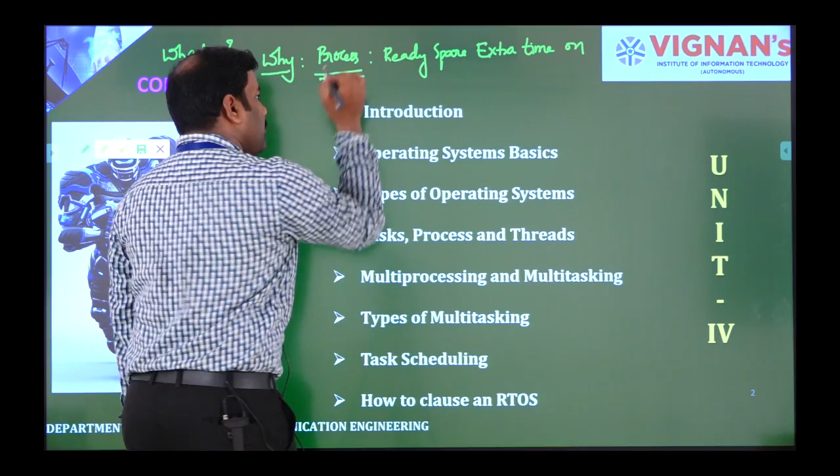So everyone nowadays needs time and finance, or money. These two parameters are very, very crucial parameters in any one of the systems, may be related to OS, may be related to RTOS, may be related to any one of the task accomplishments, whichever it may be. Time and money are the most important parameters.

So, if it is the criteria for any process, for example, I have my voice, my speech. Once I store my speech in one register, or it may be a pen drive, once it is stored, you can do whatever it may be.

Usually speech is an analog signal. For this particular signal, you need to apply sampling. Then you will get discrete components of the analog signal, which is nothing but my speech.

Once sampling is completed, then I will go to quantization, meaning based on the sampling values or discrete values, I would like to convert those values in terms of either 0 or 1, or simply we call it converting an analog signal to a digital signal.

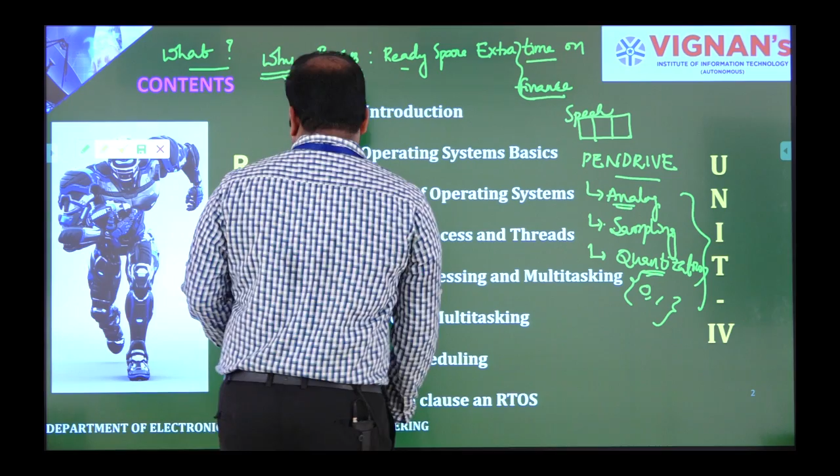For this entire process, I have techniques like, first I need to store the speech. Once after completion of storing, I need to take the support of any one of the OS, support of operating systems. Once that is accomplished, then I need to apply the technique of sampling.

Then I have to apply quantization. Then only will I get my output as digital speech.

But if I have the support of RTOS, then no need to take any one of the support of OS, because RTOS itself has operating systems. It will work based on real-time applications.

So, already having this RTOS support, and sampling, quantization, directly here RTOS will support ADC or DACs, digital to analog or analog to digital converters. So directly by using RTOS, we can operate ADC and DACs.

If it is a pure OS, we can't operate DACs and ADCs. That is the reason why we need real-time operating systems.

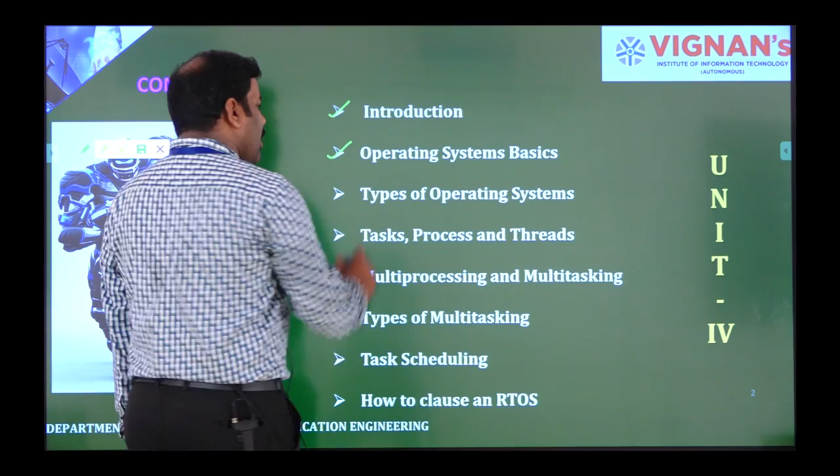So, these are the index or contents which we have in our 4th unit. First one is introduction, so why and what, that you already learned now, and next one is operating system basics, which is just like OS structure.

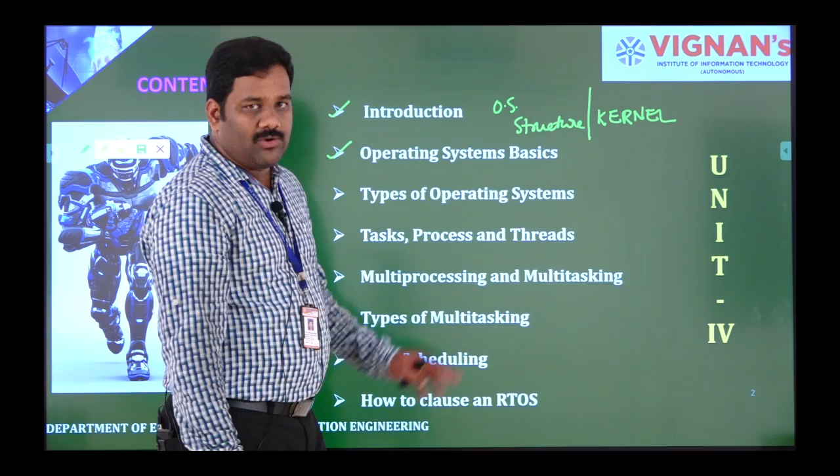Usually you people used to call it up as kernel, the heart of the OS, like the brain of a human being. What are the internal parts available with the kernel, how it is going to be operating, and what are the tasks that are going to be performed by the kernel.

Next one is types of operating systems. We have general operating systems, like you already seen Linux, Windows, Windows 98, Windows NT, Windows 2000 Professional, Windows 7, Windows 10, even Windows 8 also is there.

So what are the types of RTOS, real-time operating systems? And next one is what is meant by task, what is meant by process, and what is meant by threads in RTOS. And next one is multiprocessing and multitasking.

So what is this one? Process. Here what we have? Process. So if it is here, you are going to learn about what is one single process, and here you are going to learn about how multiple number of processes are going to be executing, and for that purpose what are the precautions that you need to take care of.

Same as here, you will have what is meant by task and how it is going to be operating. Here you are going to learn if multiple tasks are available, how it is going to be executing, and what are the precautions that we need to take care of, and how we are going to declare the tasks.

And next one is types of multitasking. Here you are learning about what is multitasking, meaning how you are going to implement several number of tasks at a time. Here multitasking types are available, 3 types are available. So which type and how it is going to be operating, we will see in the topic.

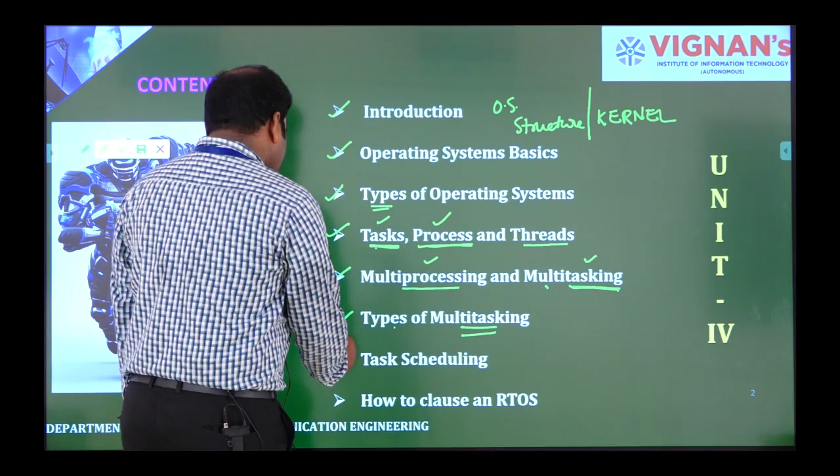Next one is task scheduling. So here you have task, multitasking, and types of multitasking. So what is meant by scheduling? It means at which instant of time which task has to be executed, based on which type of algorithm. Usually in this multitasking you have two types of algorithms available.

First one is pre-emptive, next one is non-pre-emptive. So again, pre-emptive you will have 4 algorithms, non-pre-emptive you have 3 algorithms. So what are those algorithms and how they are going to be operating, we'll see in this topic.

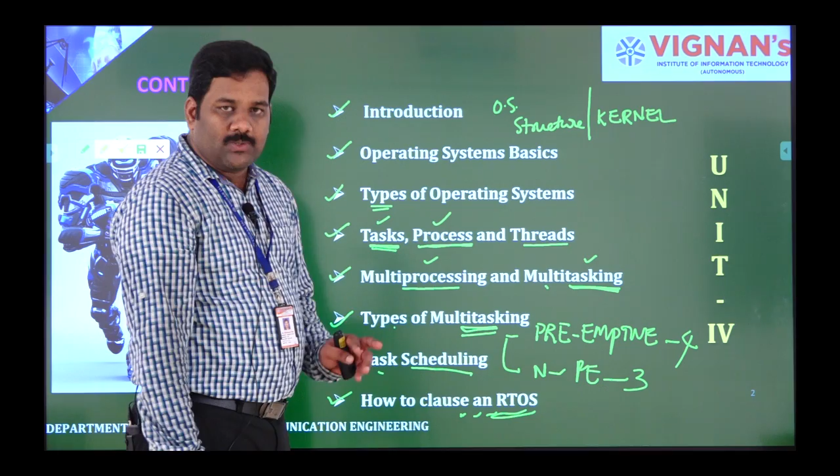And the last one is how to choose RTOS. So how you are going to decide which type of RTOS that you are going to use for a specific application. That will depend upon several parameters, and here you are going to discuss those parameters which will influence choosing any one of the RTOS.

Okay, have an introduction now. That's what exactly I'm already explaining to you people, but based on super loop based approach. So have any of you heard about what is super loop based? Super loop is nothing but simply a C program that you can write.

For example, I need to calculate, or else I need to display printf, or else I need to display hello as my output. So first I need to call header files. That's what it is, #include stdio.h, standard input output header files. Once header file is called, it means header file will support implementing any one of the logic which you are going to write in the program.

So next I'll go for void main. So this is my task. Simply I just need printf 'hello'. Meaning directly I need hello, the term hello has to be displayed in our output.

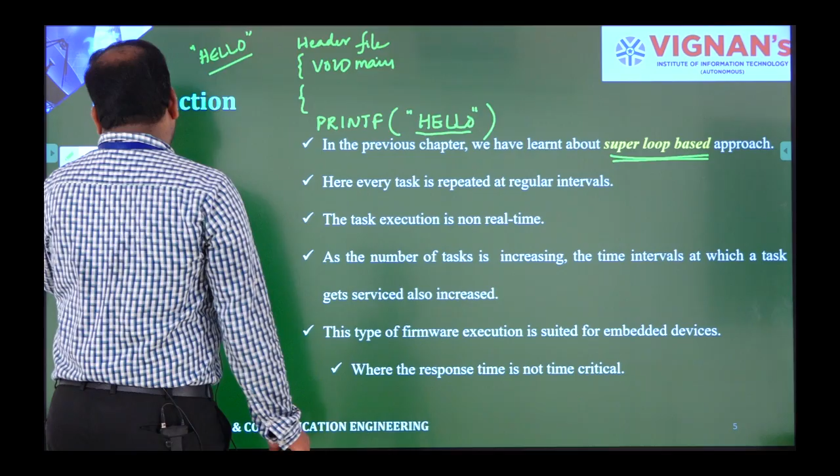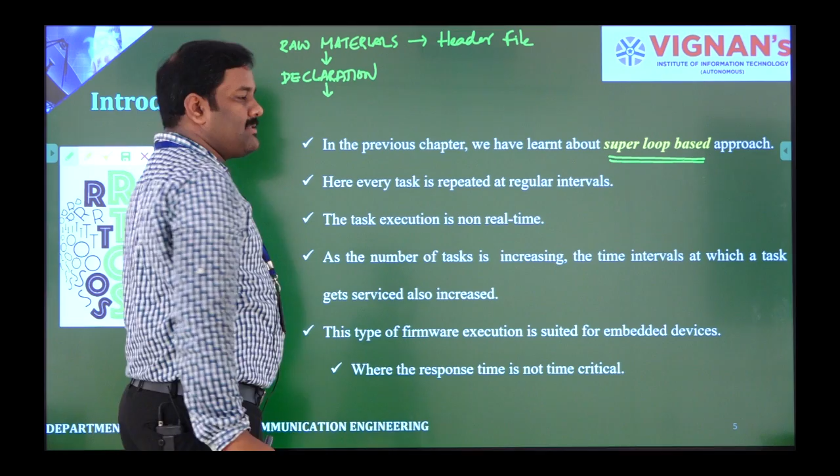Same as super loop based means, first initially we will consider the raw materials, like previously I explained, header file is the raw material. Once raw materials are taken into consideration, then you are going to declare the values, declaration part. This will take place: which are the elements or variables that we are going to use in our program, and what are the corresponding values that we are going to assign for those variables.

For example, I have 2 variables, a and b, and I have values of 5 and 10. In declaration, I declare a equals to 10 and b equals to 5. So these 2 values have been declared by the user. In this entire program, whichever it may be, the variable a and variable b will be referred with 10 and 5. That's what we are going to implement in our declaration part.

Once declaration is completed, then we are going to implement the logic level. Logic is nothing but logic as usual. For example, y equals to a and b. So a is one of the variables and b is one more variable. Between a and b, there is an AND operation. It has to execute the AND operation.

For example, here I am taking a as 1 and b as 0 if it is digital. As you are already familiar with the AND gate, what is the truth table of the AND gate? So a, b, and the corresponding output is y. You have 4 options: 0,0 or 0,1 or 1,0 or 1,1. If it is 0,0, output is 0. If 0,1, output is 0. If 1,0, output is 0. If 1,1, output is 1. This means whenever both inputs are high, only at that instant will output be 1. This entire logic can be performed by a predefined function.

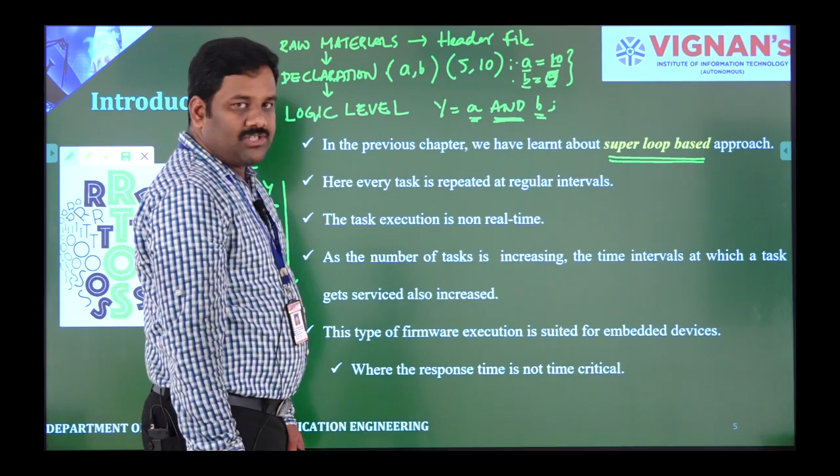We used to call it AND as a predefined function.

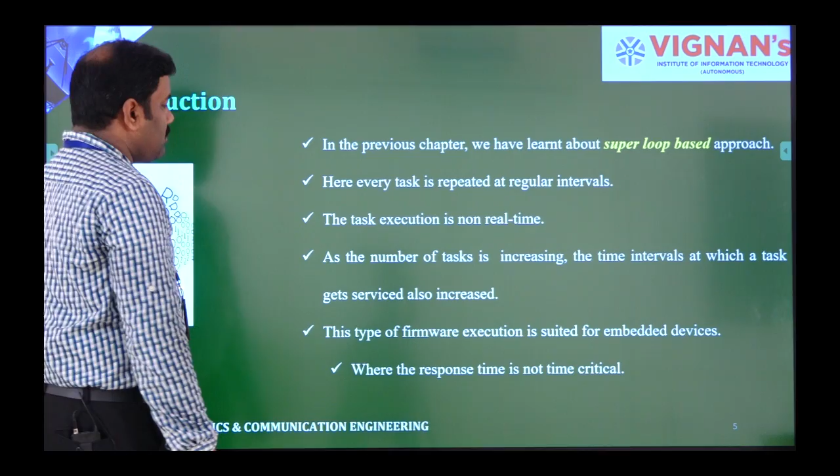Once output is going to be stored in Y, then my logic is going to be AND. So, super loop based means this is the process: initially you need to declare the raw materials, or library files, to call off or execute the logic, and the declaration part - the variables or constants that we are going to use in our program have to be declared. And the logic level is how you are going to implement and utilize these two variables. That is what super loop based approach is.

So this entire process is completely dependent on the general operating system, which can perform all these tasks, because all these actions are not time dependent.

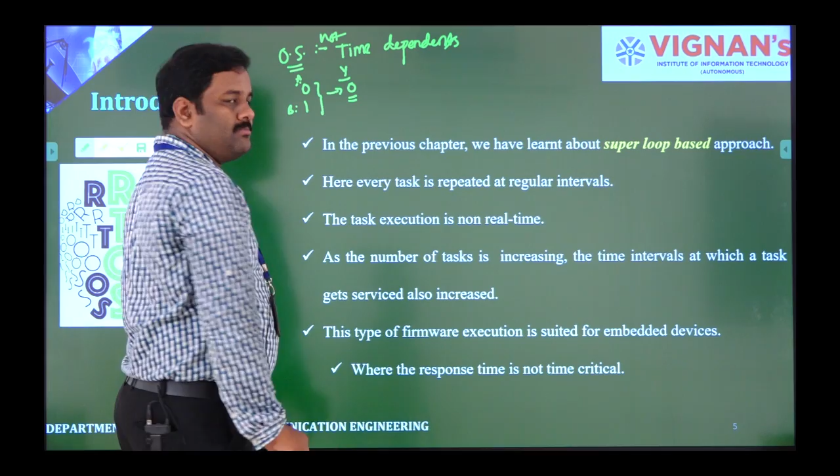For example, I have given 0 and 1 as an input signal and the corresponding output is 0, that I know. But even then, when I apply 0 and 1, the corresponding output has to display 0. But it will still take some time to display 0 - that time may be 1 nanosecond, 10 nanoseconds, 100 nanoseconds, or 100 milliseconds. We can't predict it.

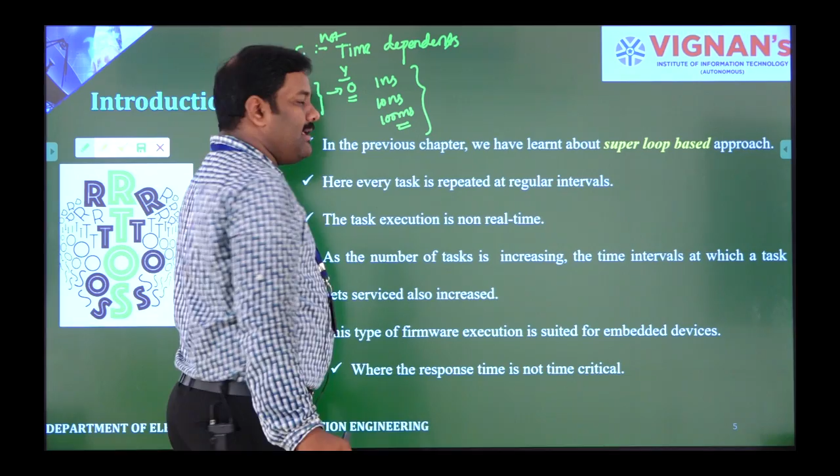But if any system is not working based on time dependence, it will not support real time applications.

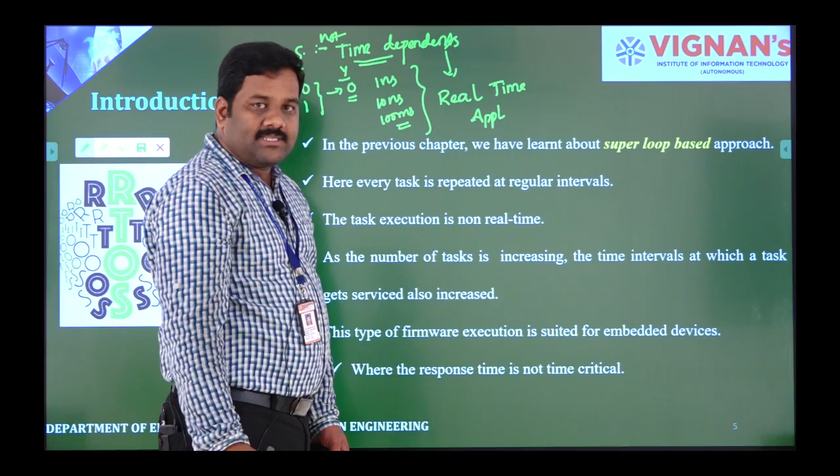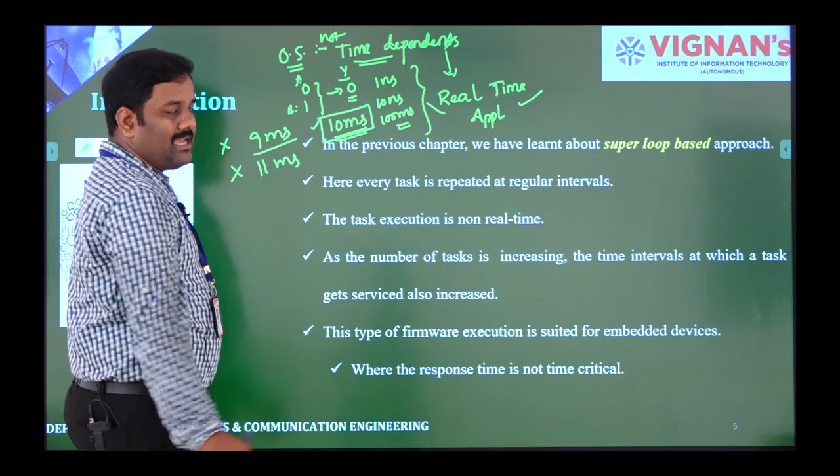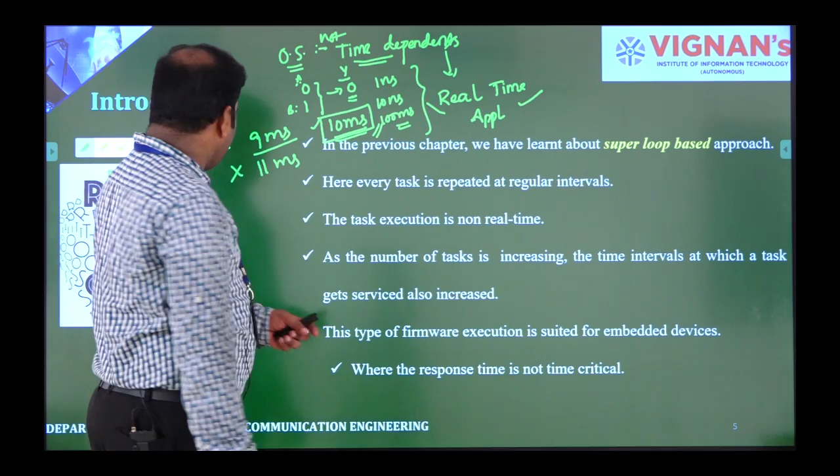If a system is working based on real time, the output should occur at a predefined time. For example, I have given 0 and 1 as input signal and the corresponding output is 0 - we already know this theoretically, but the corresponding output has to display within 10 milliseconds. This 10 milliseconds duration is already given to the system. Then the real-time application OS will display the output in exactly 10 milliseconds - it will not exceed that time, it will not give output at 9 milliseconds, and it will not give output at 11 milliseconds, because I am expecting the corresponding output at 10 milliseconds only. As a user, I have given a command to execute the output at 10 milliseconds only, so obviously the corresponding output is displayed at 10 milliseconds only.

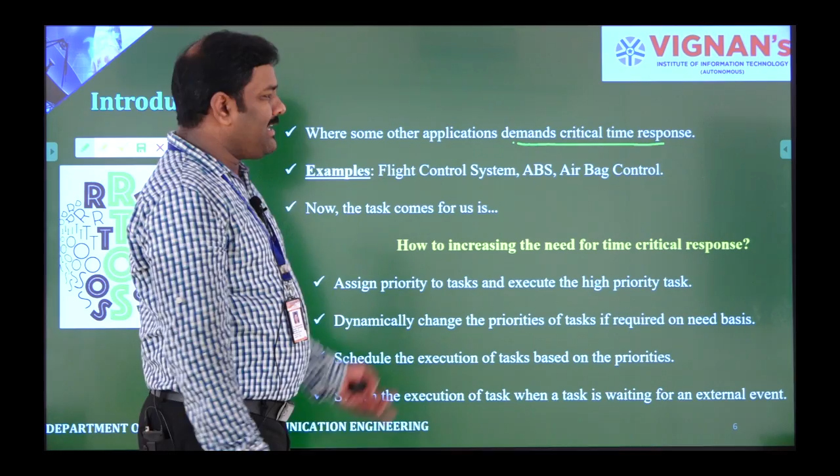But when it comes to real-time applications, it purely demands a critical time response. What is meant by critical time response? The time response should be very fast.

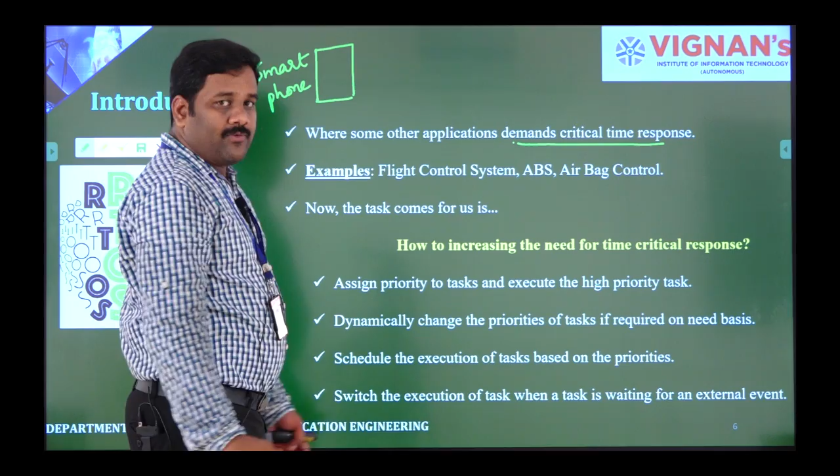Example: you have your smartphone. Somewhere in the file manager, you have a folder like songs or movies. So if you would like to watch one movie on your smartphone, you have to open your mobile, open your file manager, go to movies, and choose any one of the movies. Based on your selection, it has to play the movie.

For example, opening the file manager usually takes 1 into 10 to the power of minus 2 milliseconds if your processor is good, like 3.35 gigahertz. But if it takes 2 seconds to open your file manager, and then you tap the movies folder, that takes 2 more seconds, then you get the list of movies. You choose any one of the movies, and once you choose, it takes one more 5 seconds to play the movie. So total: 2 seconds plus 2 seconds plus 5 seconds, that is 9 seconds.

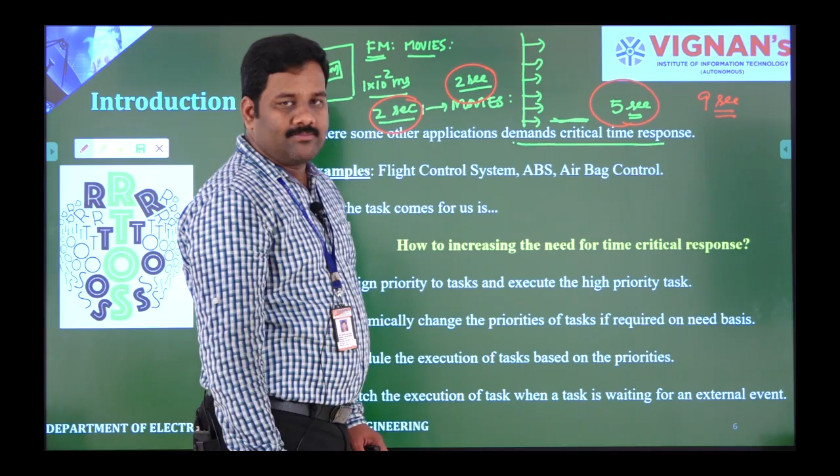If any mobile takes 9 seconds to open 2-3 folders, are we willing to purchase those types of mobiles? Usually we will not, because we need a system which works on a time-critical basis.

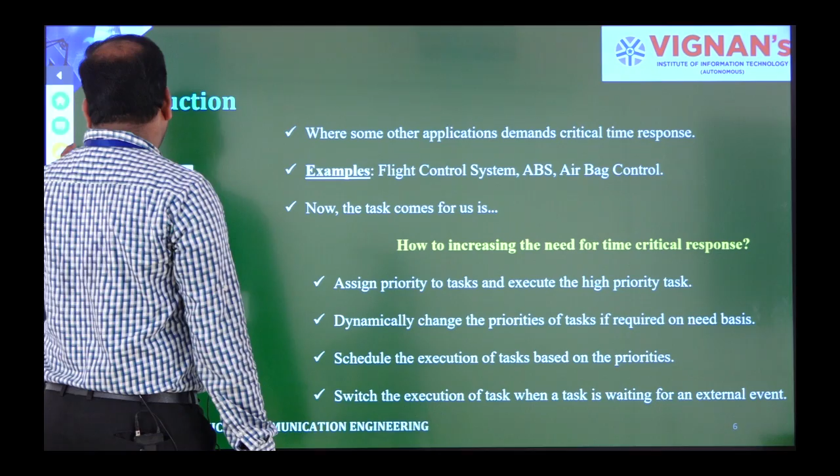Another live example: you have a 4-wheeler, usually a car. Most people know that cars have airbags. Nowadays even minimum-spec cars have airbags, whether only for the driver or for the passenger too is the question. If you go for a medium-end car, you will get both driver and passenger airbags.

So for example, fortunately or unfortunately, a car meets with an accident. Once the car meets with an accident, the airbags have to open immediately. Immediately means when the front part of the car - the engine area - hits a tree, or the road, or another vehicle, right there, depending upon the sound in decibels, it has to open immediately. Then only the driver and the passenger, both human beings, are going to survive by using these airbags.

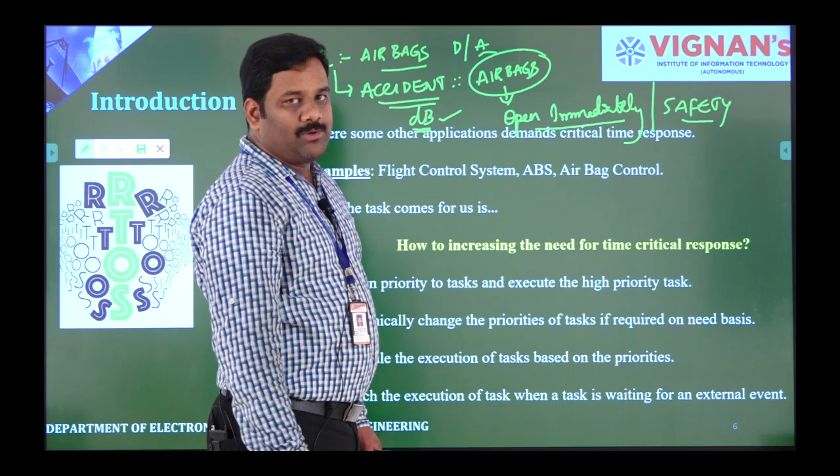This means when it hits any barrier, tree, or other vehicle, it immediately has to work - it has to work based on real-time operating systems. If it is not working properly, meaning the accident has already happened, it already hit some tree or something, but the airbags did not open - what happens to the security systems, or the safety? Is there any guarantee for the driver and passenger to stay alive? We can't give any assurance. This is the main reason why we need real-time operating systems.